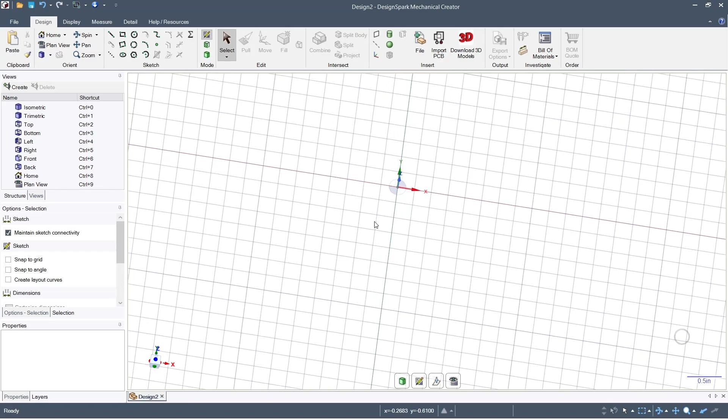If I roll the wheel back towards me, you zoom in; you roll it away from me, it zooms out. Also, if you want a different view, on the left side it says View, and if you double click on each of these, it'll change to whatever view you need. So right now I'm going to double click on top. We're going to start in the top view right here.

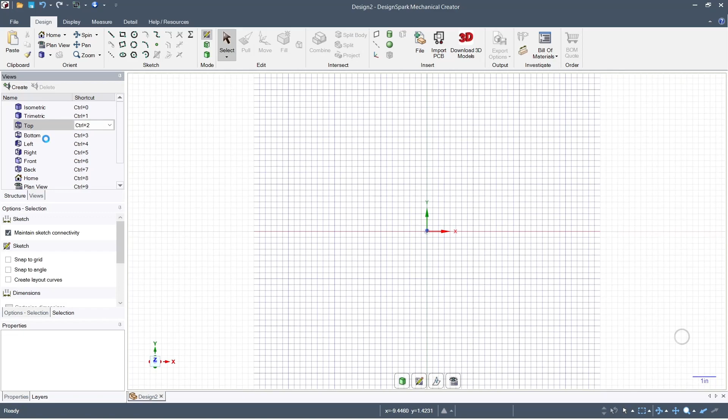For an example, let's go ahead and look up here at the sketch box. On the left side of the sketch box you have the basic drawing tools: line, rectangles, circles, and so on. On the right side of the sketch box are the modify tools, which let you put a corner on your rectangles, fillet the corners, offset, and trim.

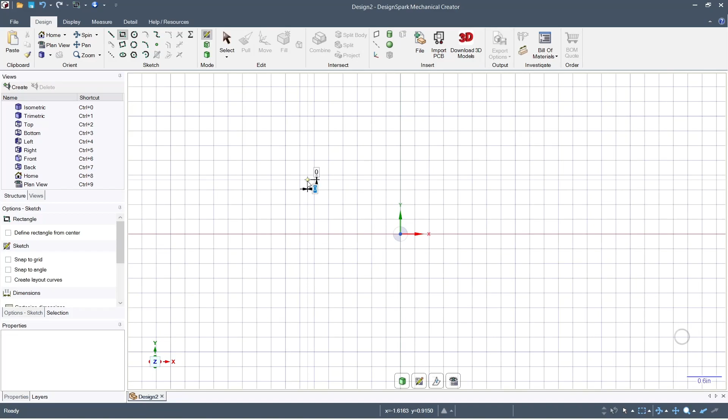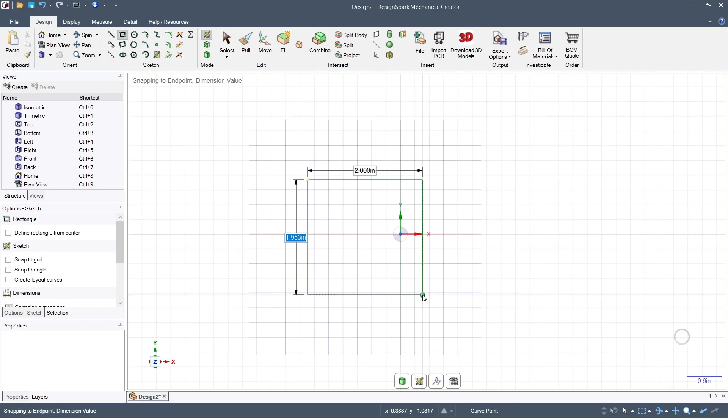So let's go ahead and click on the rectangle. I'm going to click on one point in our screen and pull to the right. If you notice the blue highlighting at the top of my rectangle, it's ready for me to put an input. So if I want that 2 inches, I'm going to put 2, hit enter, and it locks it in at 2 inches wide, then it automatically goes down to the height. Let's go ahead and hit 1, enter. Now this rectangle is locked in at 2 inches by 1 inch.

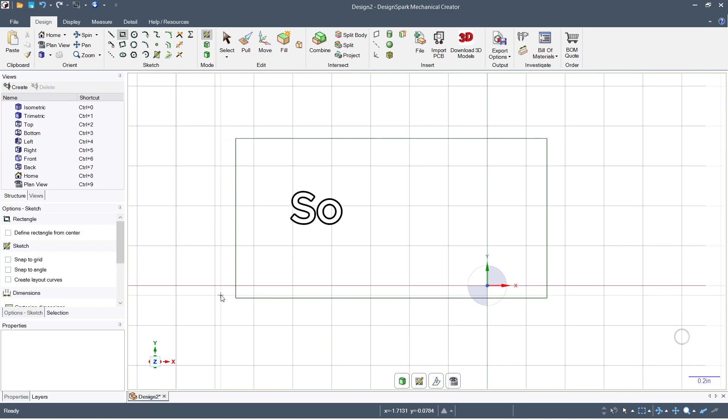So I'm going to hit escape, and let's go ahead and double click on top. It automatically created our 1 inch by 2 inch rectangle. What we can do with this is actually go up here to mode, hit the 3D mode there, and now we're in the 3D design space. With this rectangle, we can do really cool things.

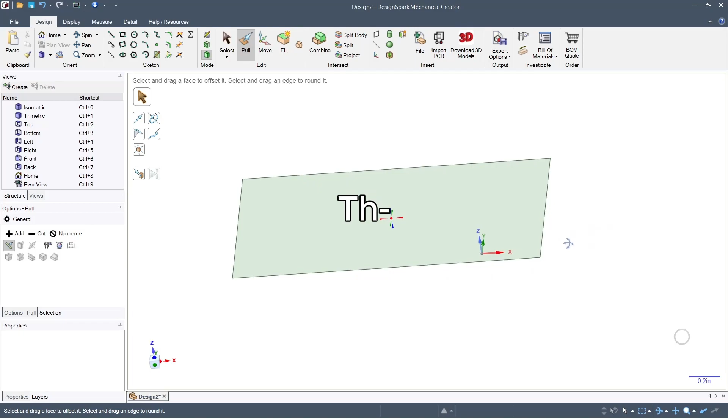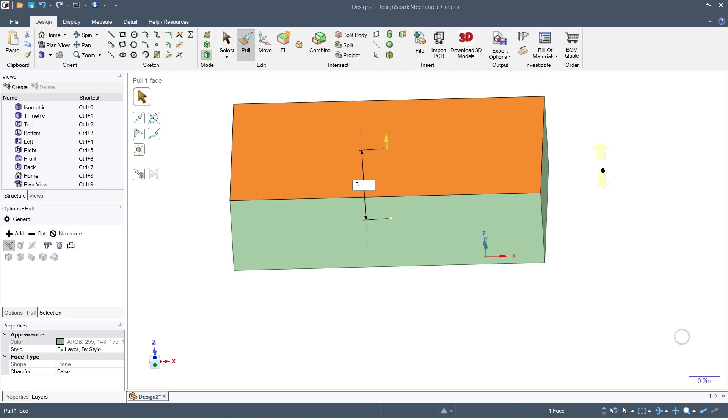I'm going to push in the mouse wheel and roll it up a little bit just to see a 3D perspective of it. If I want to extrude this, I'm going to click up here, pull. I'm going to click on the plane that I want to pull up, click outside, and pull it up, and you can see it start to extrude. When I let go of my left mouse click, now I can type in, say, 0.5. Now I've got a half inch tall rectangle. Hit escape, and we've got a box.

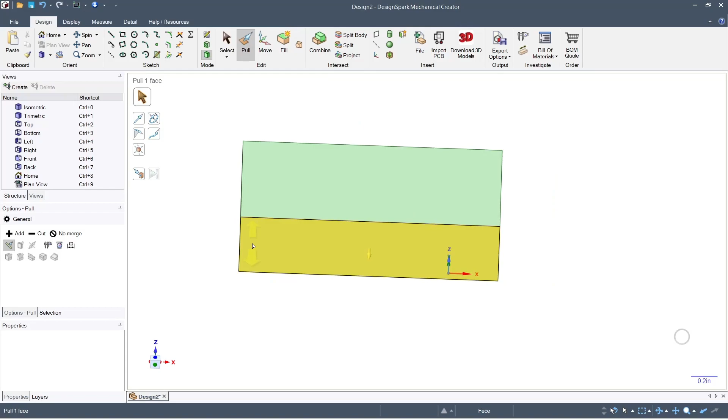Pretty cool, pretty easy. The next thing we can do is say I want to move this rectangle from this point — this is my reference point — and I want to move it to our 0,0,0 point in our drawing. I'm going to click Move. I'm going to left click and highlight over the entire box, and you can see our origin for the box here.

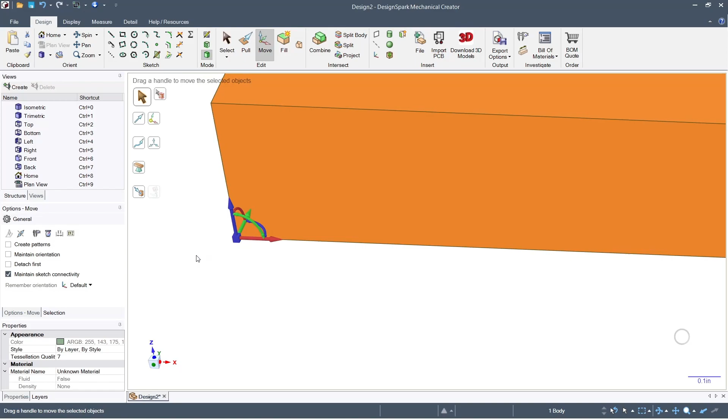I'm going to click on the center of that and pull it into the corner. You'll see it turns into a little box there. Now what I want to do, if I want to lock it from here into this, I can go over here on the left side in the options, and it says enter XYZ. I'm going to click that.

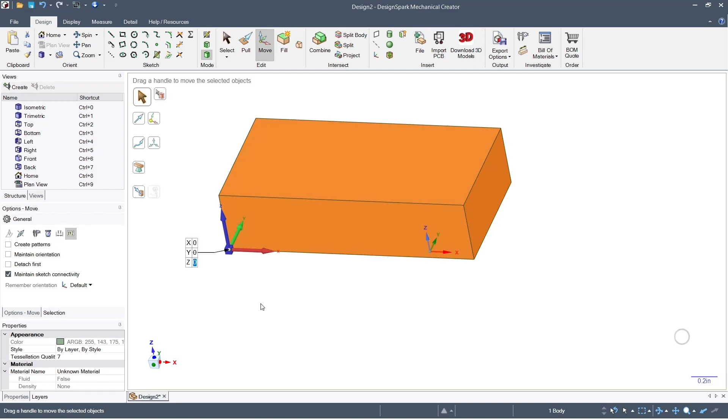And now I can move that corner of that box into position into our 0 origin. So I'm going to hit 0, tab, 0, tab, and 0, and hit enter, and it moves our box for us. Pretty neat.

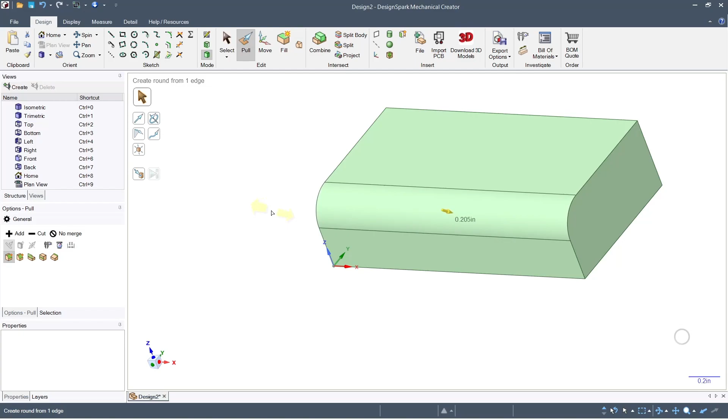Another thing we could do is put some fillets on the corner. So I'm going to hit pull, and you have options of different types of modifications on your 3D part. You can hit this corner, this front edge, the top edge, or if you want this edge right here, click on the line, click out here, and drag it with your left mouse click. When I release it, it highlights in blue to whatever radius I want.

So let's go 0.25, so we got a 1/4 inch radius. Now we radius that corner.

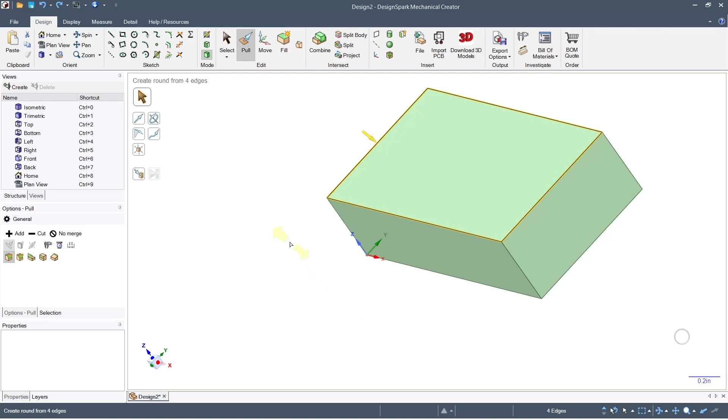So what if I wanted to radius the whole top at 0.25? I'm going to Control Z that, Control Z again, hit escape. Still in pull mode, I'll highlight over this line and double click it. Now it highlighted all the top corners of my box. If I click out here with my left mouse click and pull in, I am radiusing all the top corners. When I release it, I put in my radius of 0.25. Now I've got a top radius of 0.25 on my box.

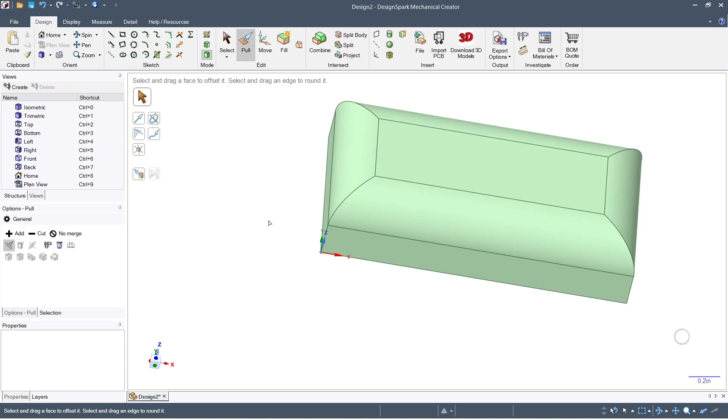So that's pretty cool. So let's put a hole in the middle of this box here. I want to go up here to the mode and click sketch mode. Now it's asking me what drawing plane do I want to start on - do I want the front, do I want the side? So I'm not clicking on these.

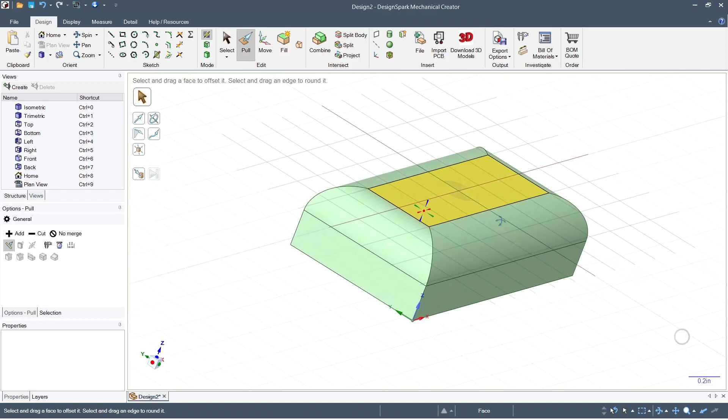I'm just highlighting over the plane of the edge, or of the face. I can do the bottom. Let's go ahead and put a hole right in the top here. I'm going to highlight over here, left click, so now I am drawing in the top plane. Let me go ahead and double click on top.

So if I want to put a hole right in the center of this box, I need a reference point. If I want to put a circle, I can't really pick up the center of this box, but if you highlight on these lines, you'll see a triangle. It locks into the center of that line, locks onto the edge right here. Let's go ahead and put a reference line.

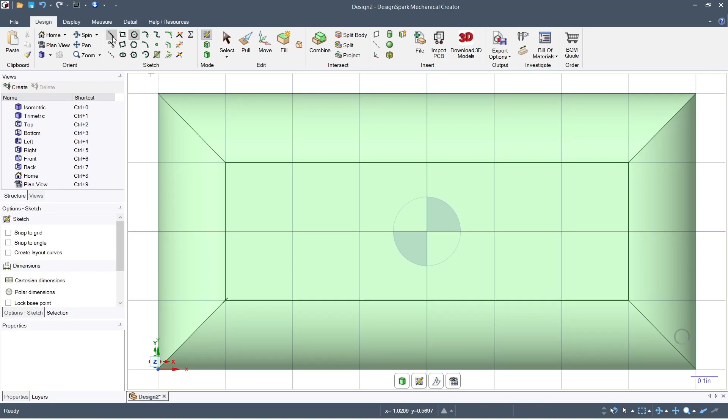So I'm going to click line, go up here, left click, pull it down here, and it's pretty neat - it keeps it at 90 degrees. You can lock this in at 90 degrees in your options, so that's basically default.

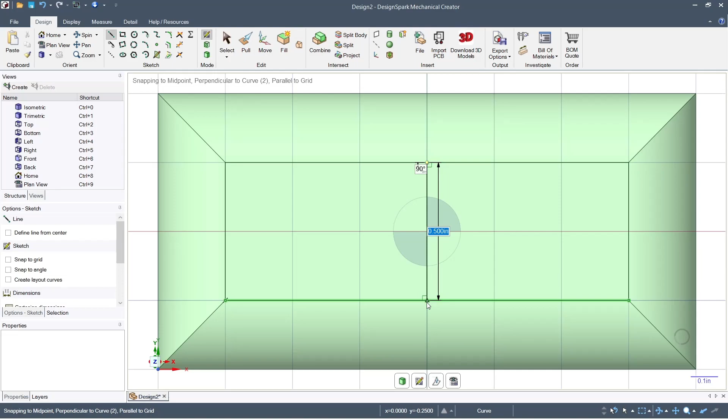So I'm going to come down to this other line. There's another triangle, left click, hit escape. Now I've got a line in the center of my box to where I can pick up the center of this line and draw my circle.

So let's go ahead and click circle, and I'm going to let it lock onto the center. Left click, pull it out. Say we want a 1/4 inch circle on the top of this box. So I'm going to release the left click, push 0.25, hit enter. Now we have a 1/4 inch diameter circle here.

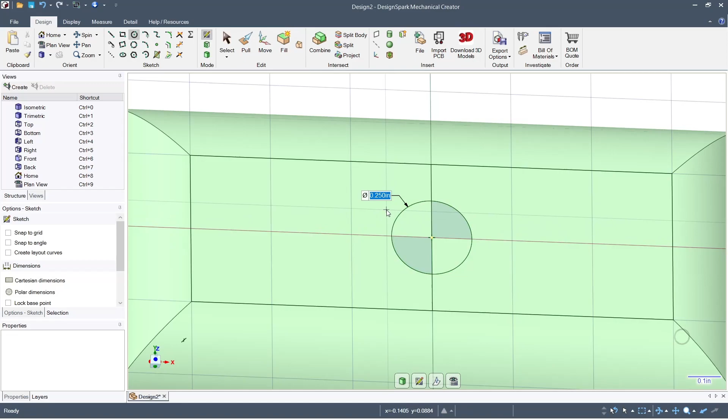Hit escape. Now, if I want to use this circle to put a hole through this, I'm going to go back to my 3D mode, and we're back into our 3D environment. So I don't need this reference line anymore. I'm going to hit select and just hit delete. I don't need this line, hit delete. I don't need this line, hit delete.

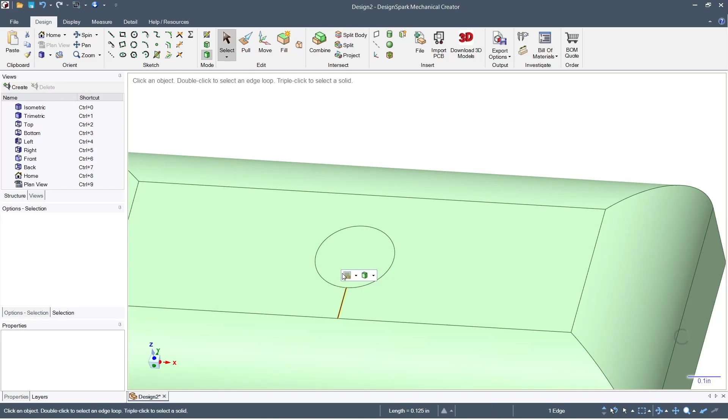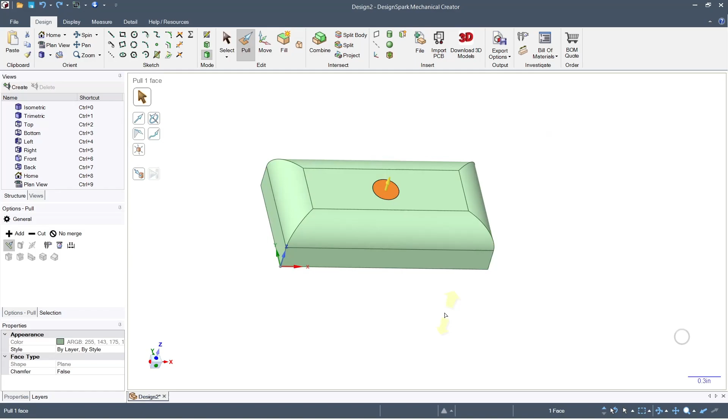Okay, so let's go ahead and put a hole through the center of this box. Now, there's this pull thing we just used before. You could either pull out a side, you could stretch your box. I'm going to hit Control Z because I didn't want to change it. But you can also go the other way too. So I'm going to click on that enclosed geometry, the enclosed face there.

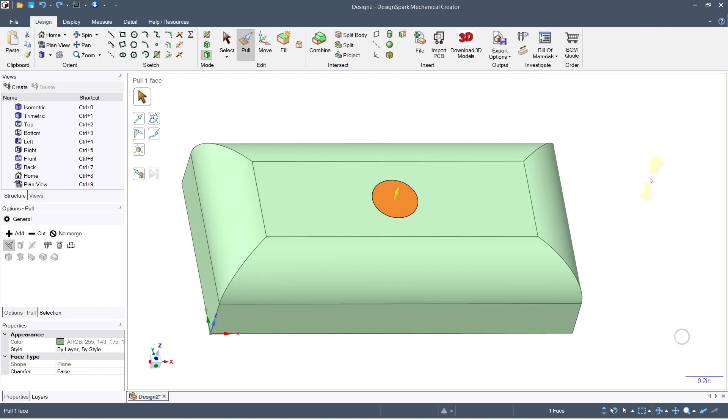So I can click on this part that doesn't include the circle. I can click on a front face, I can click on the bottom. But if I click on this circle, which is a closed face, I can pull it through. So I'm going to left click out onto the right side - sorry, left click and hold and pull down. And that pulls that face through another face, which creates our circle, which is pretty cool.

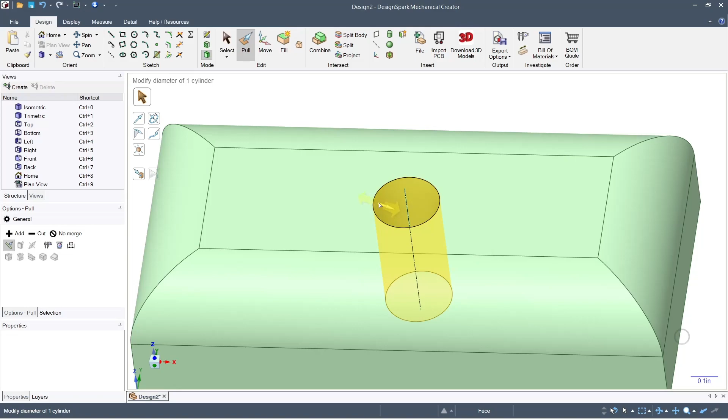All right, so next thing we can do is let's put a little chamfer on this edge right here. So I'm going to click this edge, and you can see there are these drawing utilities that come up after you click it. We can either put a round, a chamfer, or other options. I'm going to put a chamfer here - click chamfer, pull from outside of my box, and pull it down.

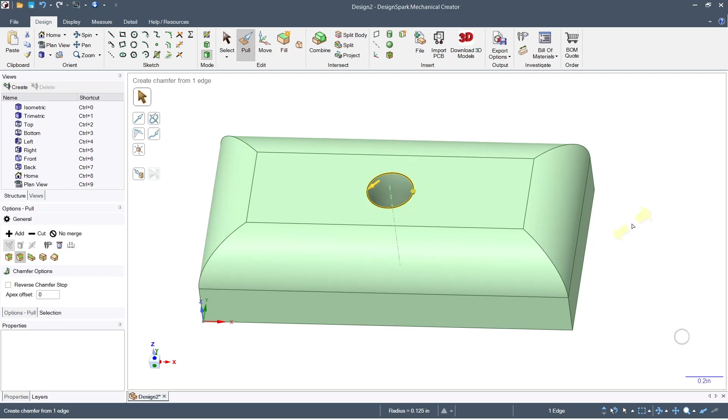Say we want a 0.1 chamfer. So I'm going to release it, hit 0.1, enter, boom. We've got a 0.1 chamfer on the top of our circle there.

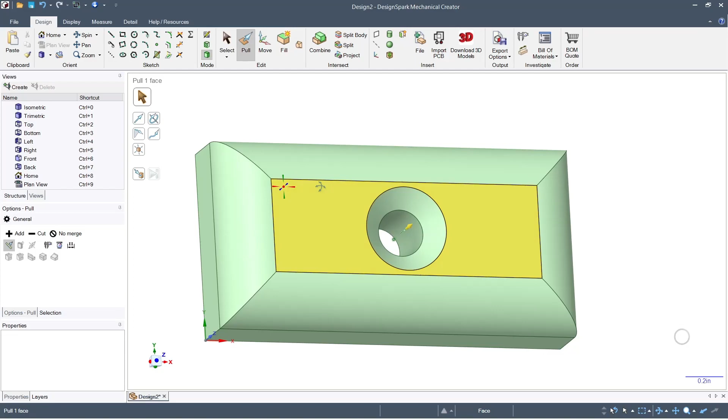So this is just a basic starting DesignSpark tutorial, I guess. Check back with me in the next video, and I will see you then.